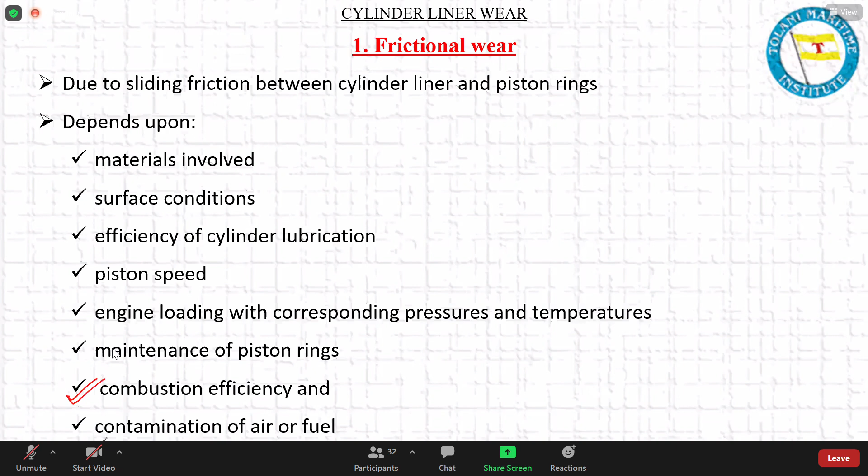This is not fitting over here because when I made it, probably I had something else in mind. This I am removing from here. Contamination of air or fuel will rather cause abrasive wear.

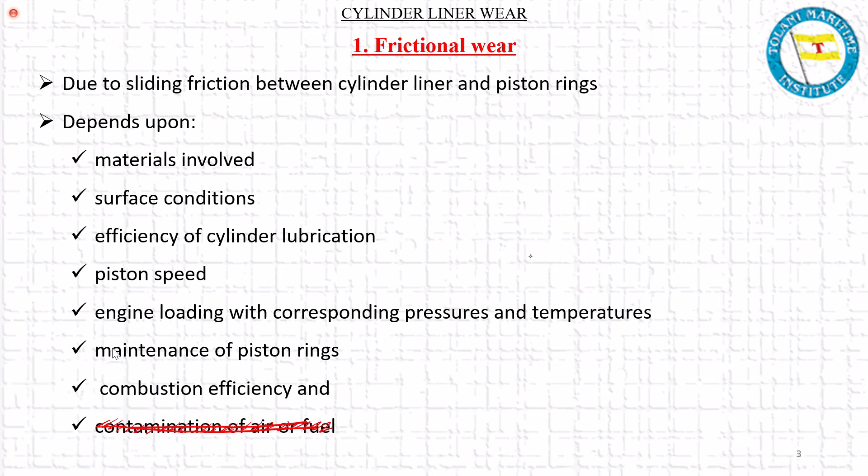Corrosive wear. Now, corrosive wear is something where there is confusion whether it is corrosion or wear; what are we talking about? There are a lot of case studies which have found that if you just run the cylinder liner and the piston ring, you can run with very low wear for a long period of time. But when the liner is exposed to a corrosive environment, the same liner wears out much faster.

And the phenomenon is not just corrosion and wear separately. It is a phenomenon known as corrosive wear, where the wear gets enhanced multiple times. Yes, the wear gets enhanced multiple times in the presence of a corrosive environment. Now, what is exactly happening? Let's try to have a look.

Are you able to hear me clearly without noise, without my sound breaking? Yes. Voice breaking? Yes, sir.

Okay. So that's what I have mentioned, a well-known fact that wear increases in a corrosive environment. There are a lot of studies which have been done. So not only liner, but elsewhere also this stands true. Wear is multiple times higher than the individual effects of corrosion and wear.

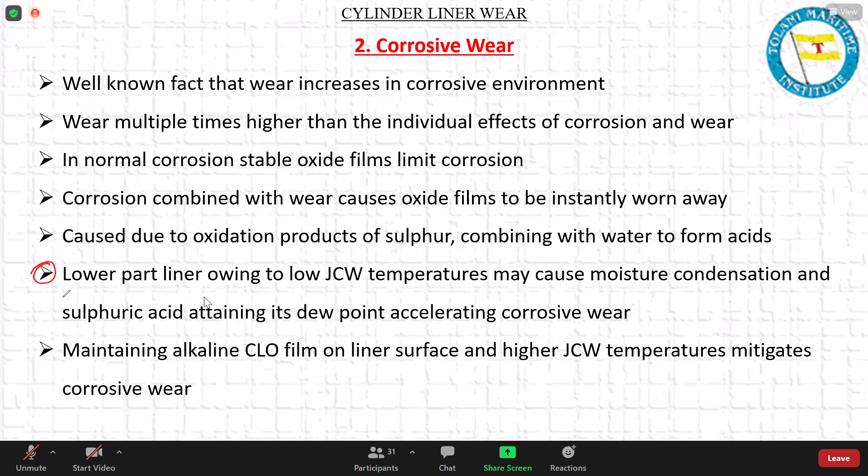तो ये क्या है? Cascading effect है. First time corrosion causes stable oxide film. Very next, piston ring goes downwards, removes the oxide film. Corrosion again, very stable oxide film forms. Again, piston ring goes upward, removes this. So this is a continuous phenomenon which is taking place, and it increases the corrosive wear. It increases the wear multiple times actually.

So this is a serious phenomenon, and that is why you need to have sufficient alkalinity and high temperature of the jacket cooling water maintained to mitigate this. So maintaining an alkaline cylinder lube oil film on the liner surface, that is one, and maintaining a higher jacket cooling water temperature, number two, will mitigate this corrosive wear. It will reduce the effect of this corrosive wear. Is this clear to everybody? Yes, sir. Let's have a look at some.

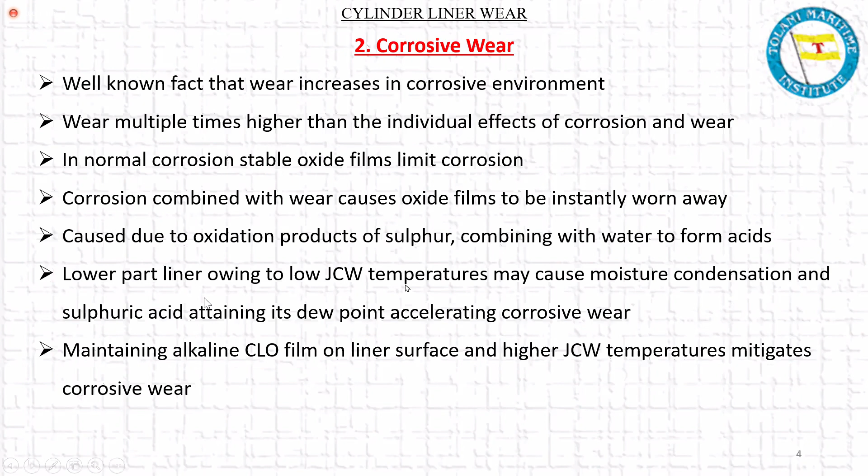Yeah, let's have a look at this. This is a pictorial representation, and you can see that if you are only having wear because of friction, you get, say, wear rate of 1. Only because of corrosion, you get a wear rate of 1. Separately acting, combined, you'll get 2. I mean, combined means individually acting. But when they act in unison, together, they attack, the wear rate increases 10 times. That is the effect of corrosive wear.

Okay, and this is a schematic representation. It says that oxide layer removal is taking place, exposing the surface to corrosion, followed by contact between the piston ring and the liner surface structure triggers the corrosive wear.

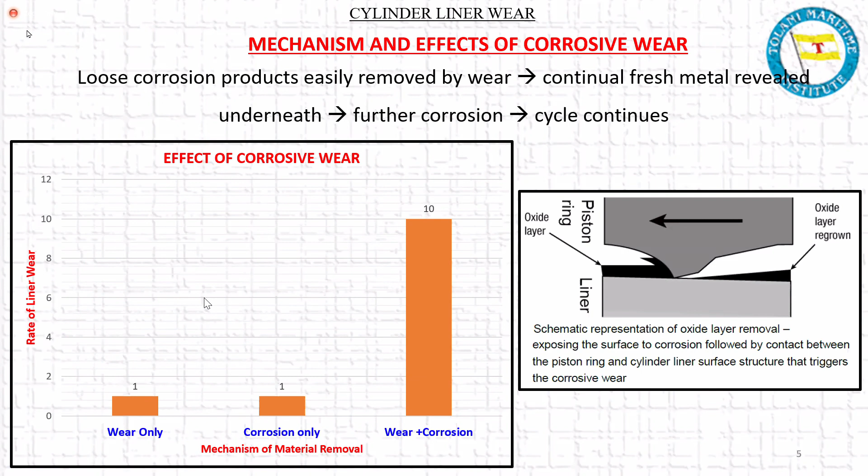Okay, so then we move on to abrasive wear. Abrasive का मतलब क्या होता है? Can somebody explain to me in very simple English what is an abrasive?

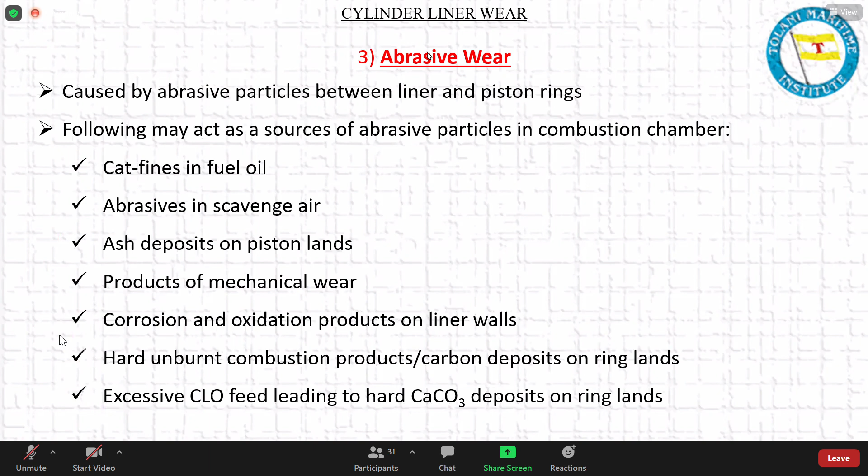Any point you have a doubt which has been discussed over here? Please let me know. Roll number 33, are you there? Yes, sir. So you have understood? Yes, sir. Okay. What about roll number 17? Yes, sir. Okay. 25? You have understood? Yes, sir. I hope that you are telling me correct, because many times it happens, and then when I ask you, you're not able to explain. I hope that you're making some notes. Excuse me, sir. Yes, go ahead.

Sir, does abrasive wear also depend on the speed of the piston, as you told about corrosion wear? All wear actually depends on the speed of the piston, but whether the speed is low or high, abrasive wear will mainly depend on the presence of abrasives. Let me go to the previous slide. Whatever factors I have put up over here, cat fine is an abrasive. Sand or dust coming from the scavenge is an abrasive.

Ash deposit, whether it is because of the cat fine ash or from the alkaline ash or from some other unburnt products of combustion, all these are abrasive. Mechanical wear metal particles are abrasive. Corrosion oxidation products may or may not be abrasive in nature. Not always, but usually oxidation products are very hard, like the chromium oxide layer which is formed is very hard. So it will definitely act as an abrasive if it gets trapped between the ring and the liner. And then any hard unburned carbon products, which I have talked about. So these are all abrasives.

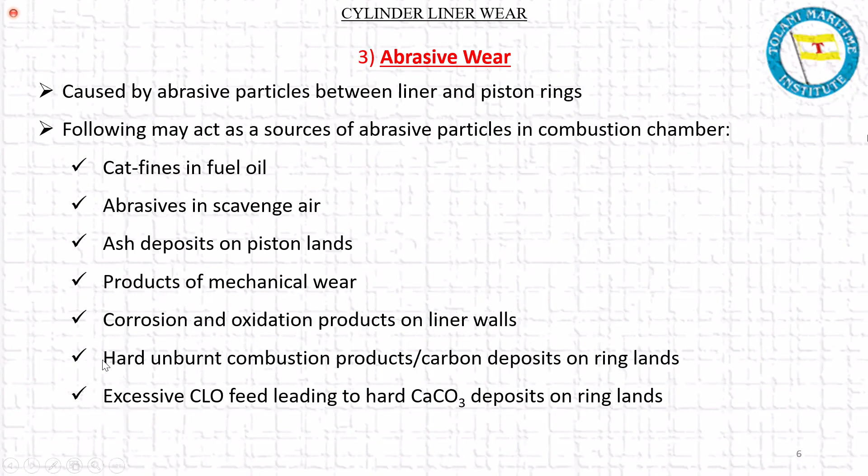So even if your speed is less or more, it does not matter. If there is abrasive in between, abrasion will take place. You can't avoid that. The only thing that can avoid abrasion is the thickness of the lube oil film. If the lube oil film thickness is, let us say, 10 microns and the abrasive particle is only 2 microns, then the abrasive particle will never get trapped between the two metal surfaces. It will just float in the lube oil film and will not cause damage to either surface.

But if the abrasive size becomes 10 microns and the lube oil film is also 10 or just 11 microns, then there are chances that you will have some abrasive wear taking place. And if the abrasive particle size is bigger, 12 microns, and the lube oil film thickness only 10 microns, 100% abrasive wear is going to take place. Is this logic clear to you? Yes, sir. It is clear.

That is why there is always a logic of putting a particular size of filter in the lube oil line. Here we are talking about cylinder lube oil, so it is not a recirculating system. It's an open system: the oil goes in and is consumed, it never comes back. But all other lube oil systems have a filter for this purpose. The filter should be able to filter out particles of that size so that scoring or abrasive damage of the bearings can be prevented.

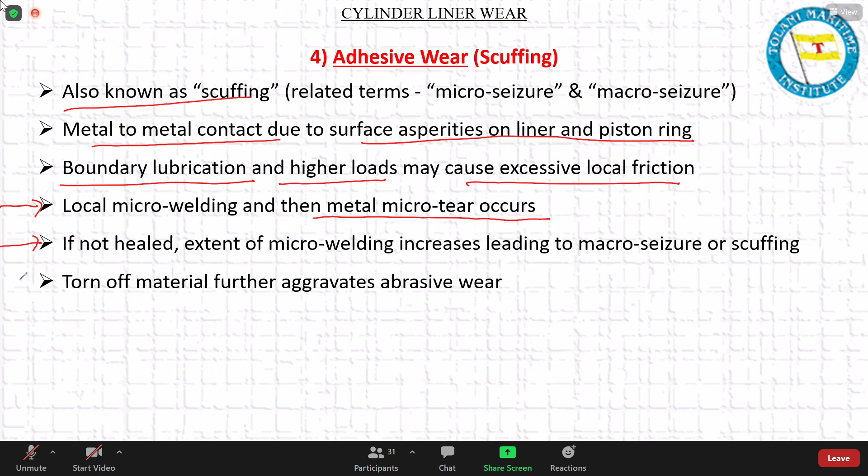How can healing happen? If we increase the lube oil quantity, probably the lube oil thickness will increase. Then the piston ring will not rub directly on the liner surface but will be separated by a thick lube oil film, and there are chances that healing may occur. But what will happen if it is not healed in time?

The extent of micro welding continues to increase, leading to macro seizure or scuffing. Micro becomes macro, it gets bigger. Large areas will be exposed, and that is called scuffing: macro seizure, scuffing, or adhesive wear. Torn-off material further aggravates abrasive wear. Always remember this, because it is either in the oil film, or sticking to the piston ring surface, or sticking to the liner surface.

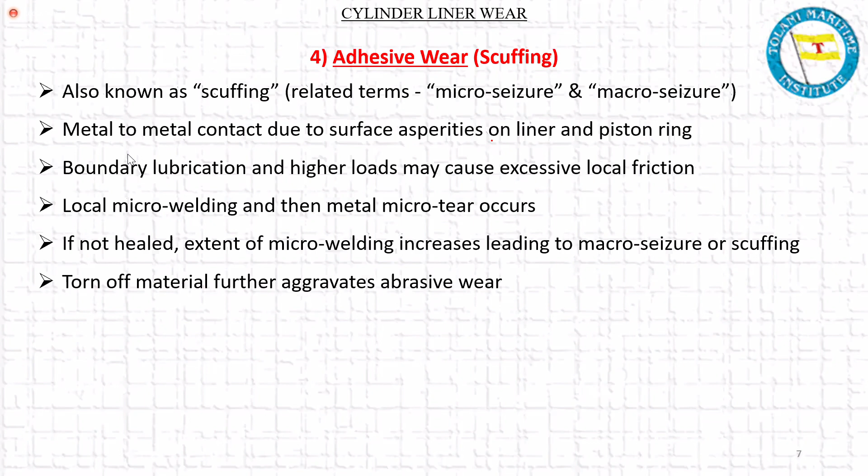These are some of the causes that aggravate adhesive wear. Local removal of oil film and poor lube oil retention: if the liner surface is highly polished with a mirror-like finish, the oil film will not be retained, and piston rings may rub the liner surface. Lube oil film removal can be because of high temperatures, poor lubrication or boundary conditions, incorrect quantity, quality, distribution, or timing of cylinder lube oil injection, and blow past.

If the sealing is not taking place properly, or if the piston rings have collapsed, blow past will take place. Blow past removes the oil film locally in that area. Again, it can cause further micro seizure. It can cause scuffing damage because oil is not present in a certain area because of the blow past.

I told you, if a high amount of cylinder lube oil is sent with high alkalinity content, then all of this lube oil may not get consumed, and it will form a lot of ash deposits on the piston ring lands, which can cause bore polishing of the liner.

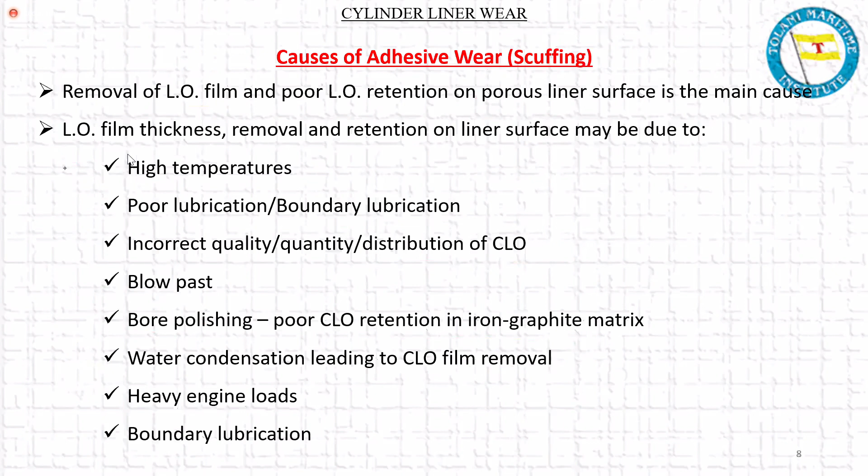What is the effect of adhesive wear? The normal liner wear rate is considered to be 0.1 mm per 1000 hours of diameter. So diametrically, the liners are supposed to be reducing 0.1 mm every 1000 hours as normal wear.

But if macro scuffing or macro wear, adhesive wear, is taking place, it can reach several millimeters per 1000 hours: 2, 3, 4, 5 millimeters per 1000 hours. And micro tear particles, as we know, further act as an abrasive, and they increase the abrasive wear. So first you have an adhesive wear.

Adhesive wear leads to further abrasive wear. So adhesive wear has got a cascading effect, and it increases the abrasive wear. First adhesive wear will start, then abrasive wear will aggravate, and that will increase.

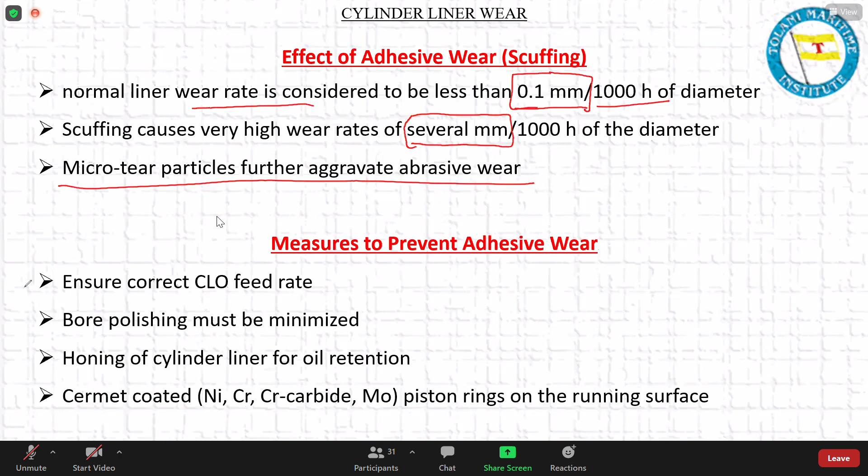So what are the mitigating measures? Increase the cylinder lube oil feed rate, and if the feed rate is too high, then decrease it. Too high will cause a lot of ash deposits, which are going to cause a lot of abrasive wear, and that abrasive wear will cause bore polishing of the liner. It's indirectly related, and that bore polished liner will cause adhesive wear.

So things are interrelated. How they are interrelated, you have to sit quietly and think about it, how it is going to affect. Bore polishing must be minimized. That is its effect. If it is excessive, then bore polishing will take place. If it is less, then it can directly cause the adhesive wear to increase.

Honing of the liner. Do you know what is honing? Yes, sir. What is that? Sir, it is done to polish the bore of the liner by a honing tool. It's not polishing, it's the opposite. To make some structure which can retain the lube oil on it.

Yeah, so it is actually a kind of micro roughening of the liner surface, not macro. It's not that if you touch it you'll find it has become rough. It's a micro roughening of that surface with a carborundum tip tool, which hones the liner surface so that the oil can be retained on the liner walls.

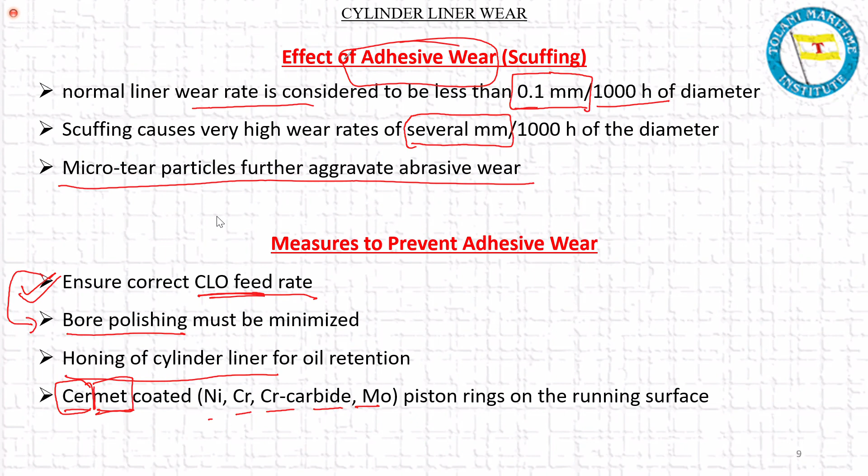I will talk about clover leafing in the next class. Please remind me. The next thing is clover leafing. We'll talk about this adhesive wear also. I'll show it to you in the next class.